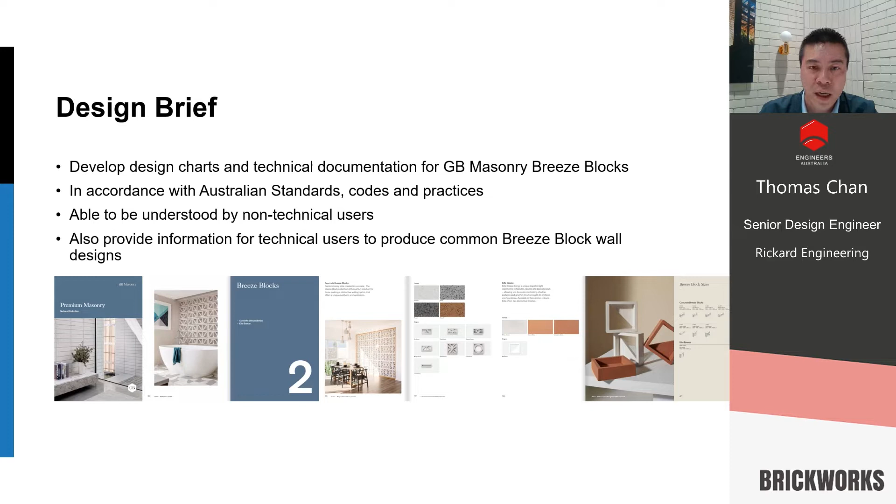But more importantly, we also provide information for technical users such as structural designers and facade designers to produce common breeze block wall designs. So when you start to design a breeze block wall, you probably have a few questions to ask. Say, if I choose a breeze block type, what bond pattern can I use? Can I use stack bond or stretcher bond or any other type?

The second question is, how do I support it? There are combinations of supports from bottom, top, or sides. You may have four side supports, three side supports with the top free, three side supports with one side free, or two side supports, which is top and bottom, or left and right supports. So among these variations, what is the largest wall in height and width you can build?

So, applicable standards. We designed the breeze block wall in accordance with the Australian standards. The first one, the most important, is the basis of design, the 1170 series: Part 0, general principles; Part 1, permanent, imposed, and other actions; and Part 2, which is the most concentrated part in our design, wind actions. And in some cases, if you build a house, you can probably use Australian Standard 4055.

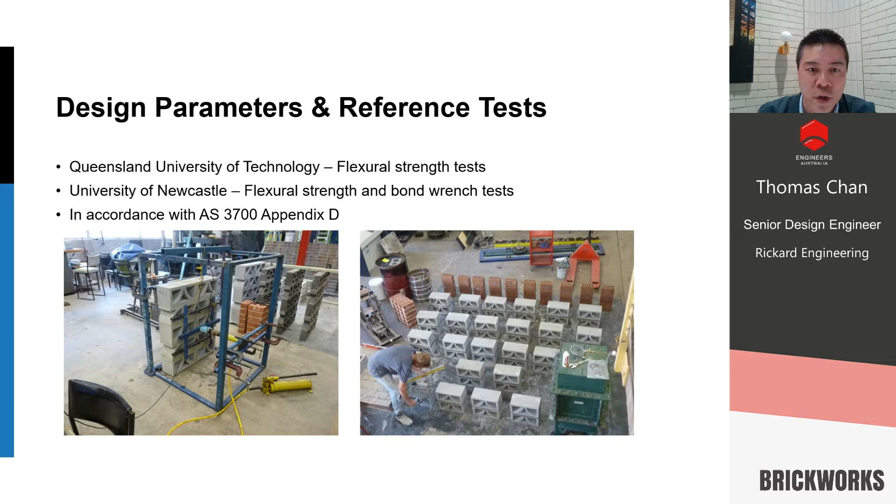And as you can see from the photos, we have tested a large number of specimens for each type of breeze block. So we can use the large amount of data to calculate the characteristic strength of flexural design parameters.

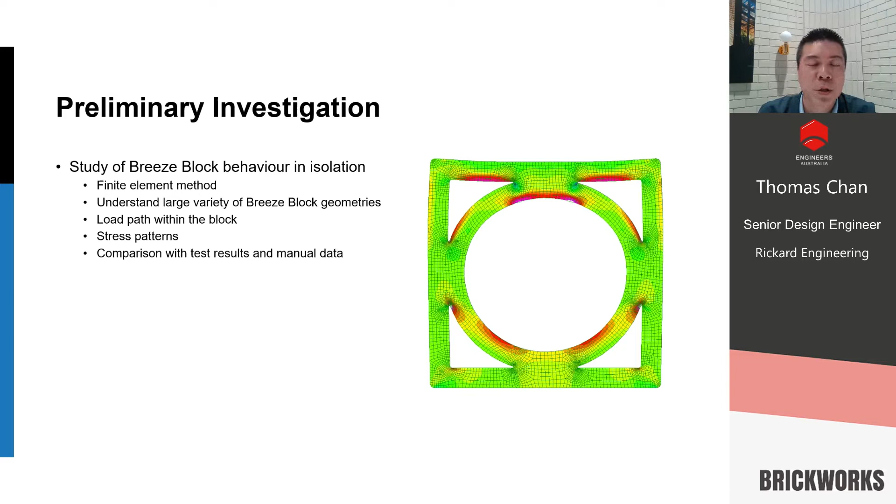After we have done the tests, and before we generate the design charts, we did a preliminary investigation on the breeze block. We have done a series of finite element models for each type of block to understand the large variety of block geometries, the load path within the block, stress pattern, and most importantly, we compared the test results and design manual data with these finite element results and found they're comparatively reasonable. And the test results could be used for the next stage design.

Analysis methodology. So the design principles are in accordance with Australian Standard 3700. We have unreinforced designs, which are designed with consideration of masonry and mortar strength only. We have also designed it as reinforced blockwork. It's designed with consideration of masonry and reinforcement.

And in accordance with Australian Standard 3700, Clause 4.6, there is a minimum robustness requirement of 0.5 kPa. So in our design charts, we provide a minimum loading of 0.5 kPa for the users to do the design.

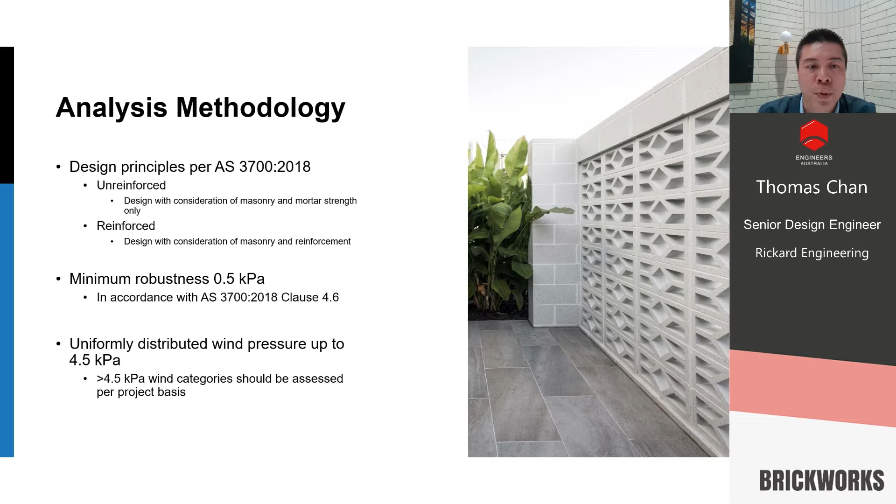And for the upper bound of the wind pressures, we chose to design up to 4.5 kPa without the porosity factor. So if you include the porosity factor, the allowable design basic wind pressures could be even higher. And this wind pressure should cover most of the design cases in Australia. However, if you have a wind load more than 4.5 kPa, it should be assessed on a project basis with a competent structural engineer or facade engineer.

So, design assumptions. This is very important for designers to understand what assumptions have been made in the design charts. First, as I said before, these design charts for the breeze blockwork are for a non-load-bearing wall, so there's no superimposed compression from above. At the supports, we assume there's no rotational restraint, which is a pin support. We always assume 10 millimeter bed joints and perpends. And M4 mortar is assumed.

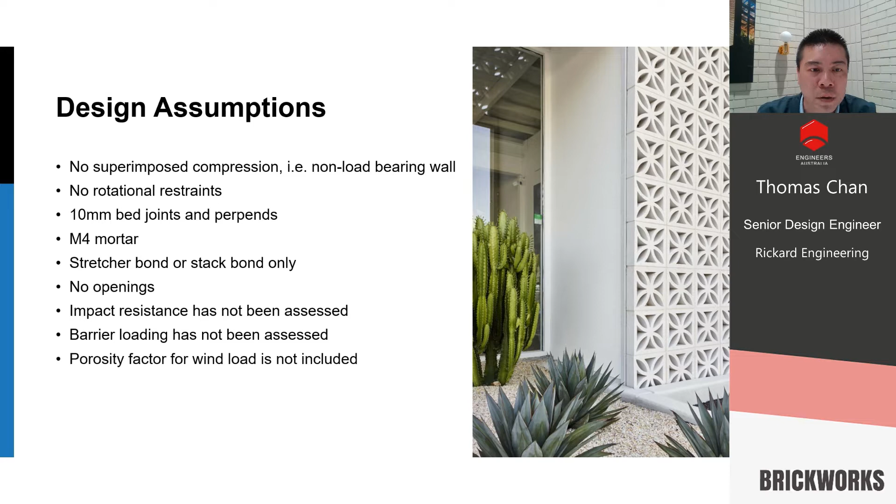And we design for stretcher and stack bond only. So there's basically no openings. If you design a wall with an opening of a certain area without any brickwork or breeze block, this is not covered in this design. As I said before, impact resistance has not been assessed, nor barrier loading. And most importantly, the porosity factor for wind load is not included. So in the next part 2, my colleague Alson will talk about this as an example.

So, grouping for designs. There are 8 different types of breeze block: circle, flower, kite, linear, cloud, diamond, wedge, and arc. We group them to simplify the design charts and minimize the number of charts we need to produce.

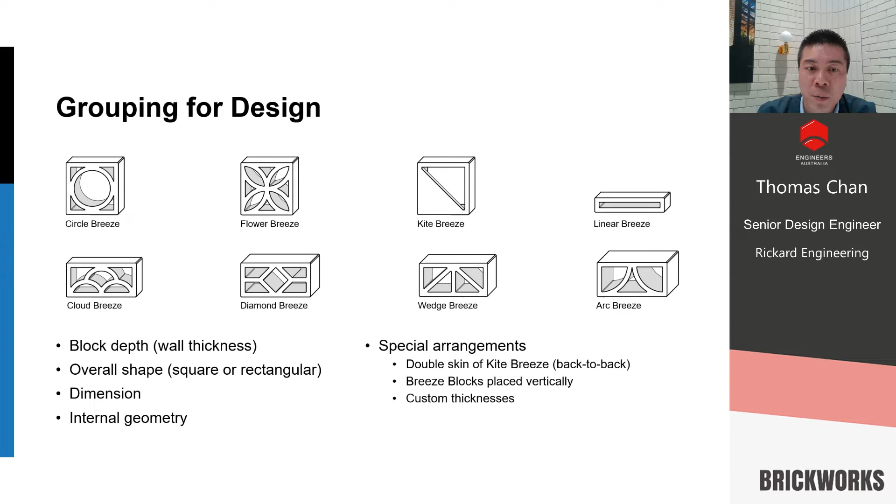We group them based on block depth, which is the wall thickness; the overall shape, square or rectangular; the dimensions of the breeze block; internal geometry; and special arrangements. For example, the kite breeze could be a double skin, which is a back-to-back double layer, or the breeze block placed vertically or horizontally. And sometimes we have some custom thickness, which is cut from the standard thickness.

So after a study, we have grouped them into mainly 6 categories, or 7 actually. The first group is square in 90mm thick: we have circle and flower breeze. Rectangular in 90mm thick, including diamond breeze, which is tailor-made, cloud breeze, and wedge breeze, also non-standard thickness. Rectangular in 140mm or 70mm; 70mm is a custom thickness cut from the 140 standard. This includes diamond and wedge. Rectangular 180 thick, which is the arc breeze, kite, double skin or single skin, and linear.

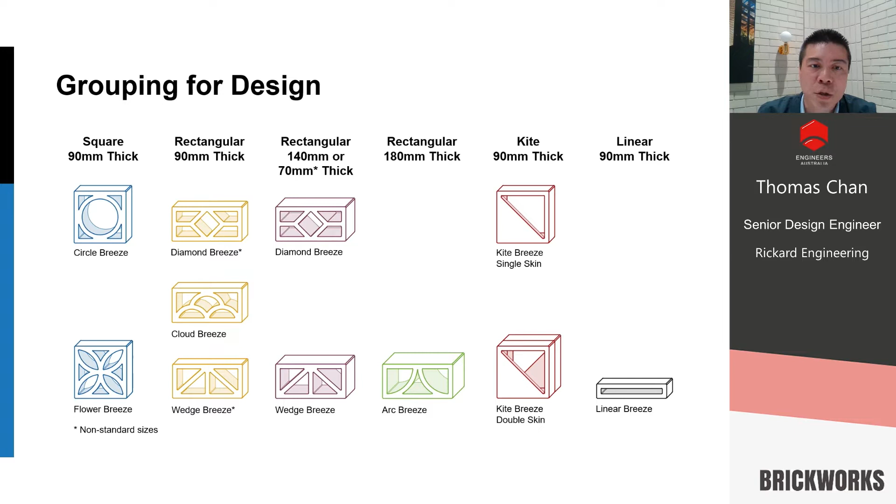The main purpose of this grouping is to minimize the number of charts, as I said before, but also to give the designer, particularly the architect or the interior designers, the flexibility to use different breeze within the group, because we design the charts for a single group with the most critical design parameters. That means within the same group, you can mix those different breeze to allow you the most flexible, aesthetic designs.

So, design flows. Based on the design parameters, assumptions, and grouping I said before, we designed the charts with calculations to Australian Standard 3700, with different wind loads, wall dimensions, bond patterns, support conditions, and different wind post designs. For all these different requirements, we have produced nearly 120 design charts. Here are 2 sample design charts, and Alson will talk about this in detail in the next part.

When you start the design of a breeze block wall, you need a layout height and width of the breeze block. Then you can choose the bond pattern, and then your breeze block type. Then you need to figure out how many and which sides can be supported, and determine the design wind load. Based on the manual, you choose an unreinforced or reinforced breeze design, and support options like wind posts or supports from the structure that are appropriate for your design wind load. Then you can check from the chart what wall dimensions are allowed and whether this complies with your layout design height and width.

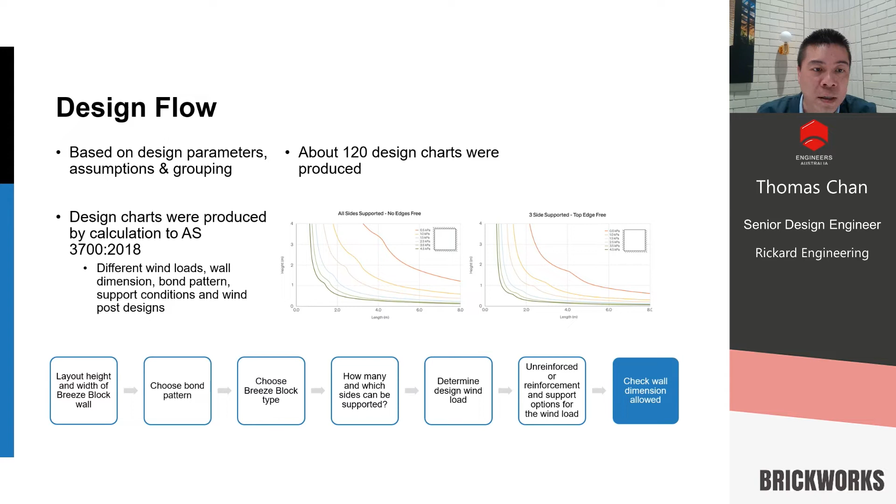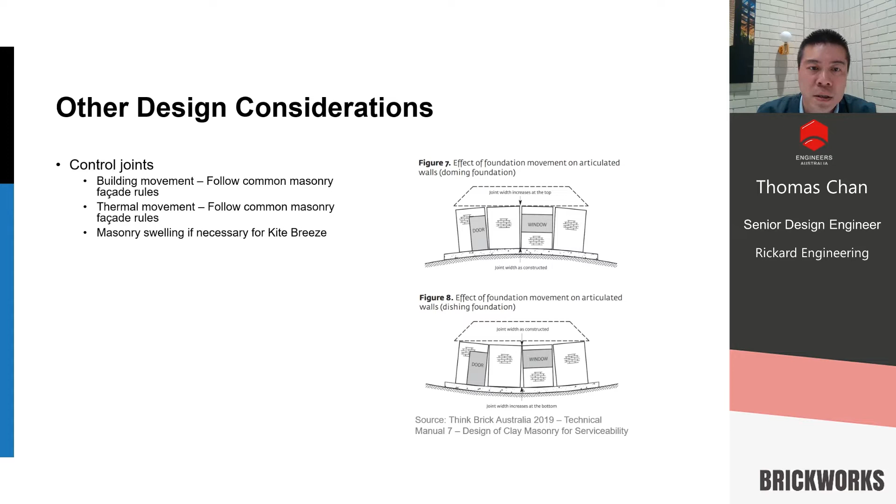Masonry swelling, if necessary, for kite breeze, because kite breeze is not a concrete breeze. If it is considered necessary, you may allow for swelling movement of the bricks. Applicability of using breeze block porosity: for a certain usage, based on the Australian standard, whether you can use the porosity to calculate the porous cladding reduction factor to give you a more efficient design, or particularly for freestanding walls, you may have a different porosity factor.

Breeze block corners. If you have a corner with two sides of breeze block in orthogonal directions, and the walls support each other for lateral wind, meaning one side of the corner supports the other orthogonal direction through horizontal axial capacity, this should be assessed on a project basis. Breeze block fully freestanding walls: this one is not included in our designs. The cantilever supports need to be designed on a project basis to achieve 2 or 3 side supports, but the infill block wall may be based on our design charts.

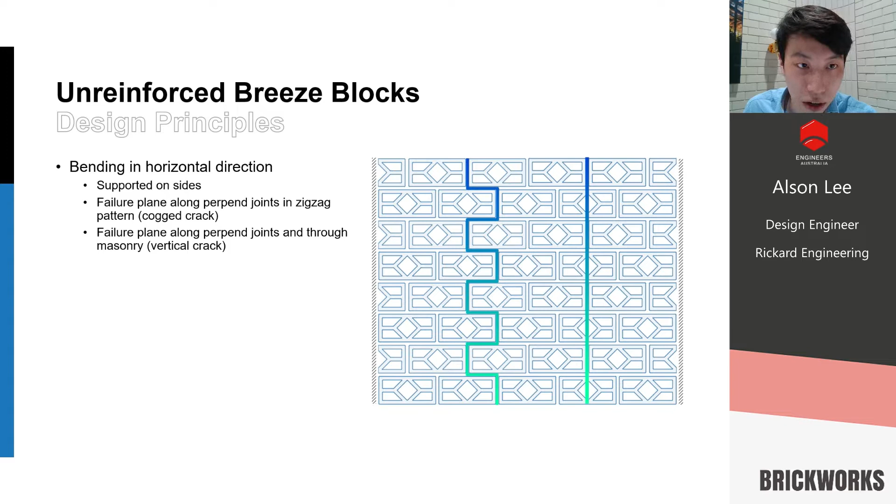In some cases, which is especially more pronounced in the breeze blocks, there is a failure plane along the perpend joints and also through the masonry. It's kind of like a straight crack through the whole wall. So this failure is dependent on both the mortar and the block strength itself. So following on this, our breeze block specific consideration, which is atypical of a normal bond masonry wall. As stated previously, it has a weaker section than typical masonry, reduced horizontal bending capacity.

And what do I mean by that? We need to identify the weakest plane in each block geometry. So for each type, we are trying to identify where we expect the flexural failure to occur. There are simple examples, so I'm going to start off with the circle here. Obviously, the weakest failure plane would be within the center of the block. But for more complex geometries, it may not be so obvious, such as the flower. One might say that the failure plane might be within the middle, but others may say that the point of failure might be slightly towards the edge.

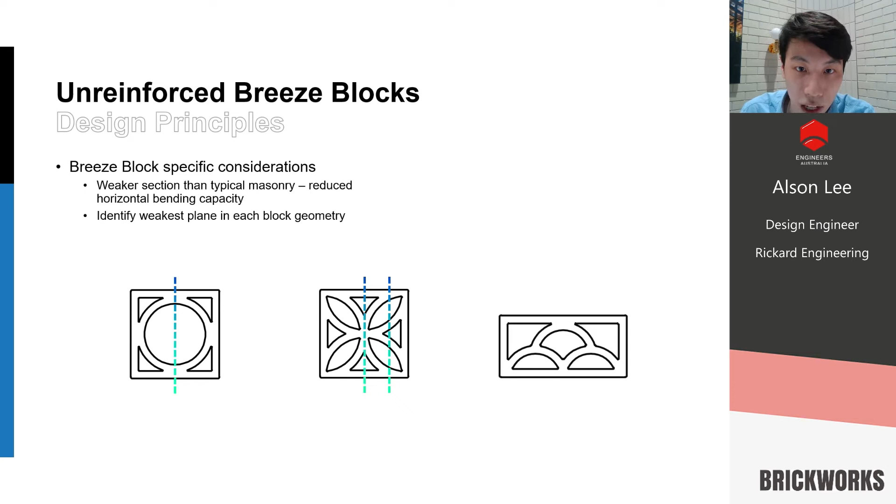Now, through our finite element studies, we have identified the critical failure plane and have developed design charts based off of that. Going through one more example, say the cloud breeze. Again, the center failure plane is the most obvious to consider, but how about an off-center failure plane? Or in the case where we're doing a vertical configuration, to induce a different direction of bending, we may also consider a horizontal failure plane like this.

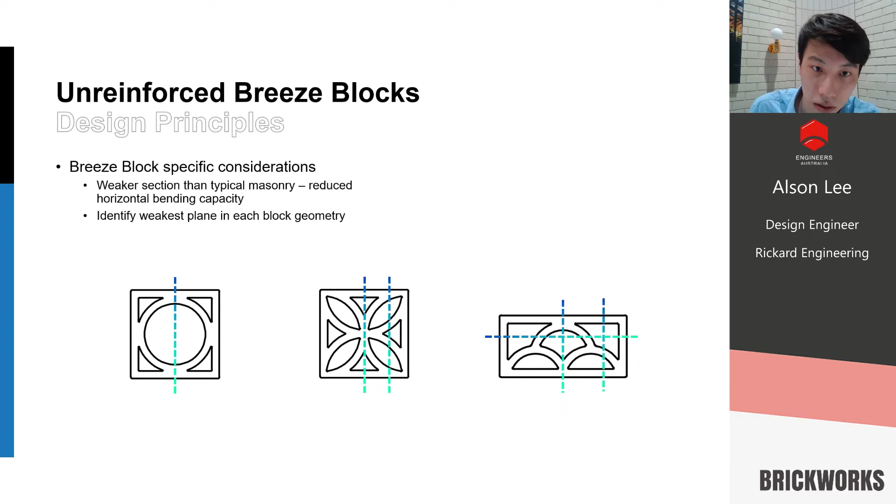Now, unreinforced walls must be stretcher bond only. The reason for this one is due to design requirements from AS 3700. Stack bond has no horizontal bending resistance in accordance to 3700, and the reason is because of the perpend spacing factor, to be more technical. There is no allowance in the code to allow you to make an unreinforced stack bond wall. So stack bond cannot be unreinforced and must be reinforced, which will be addressed in the following section.

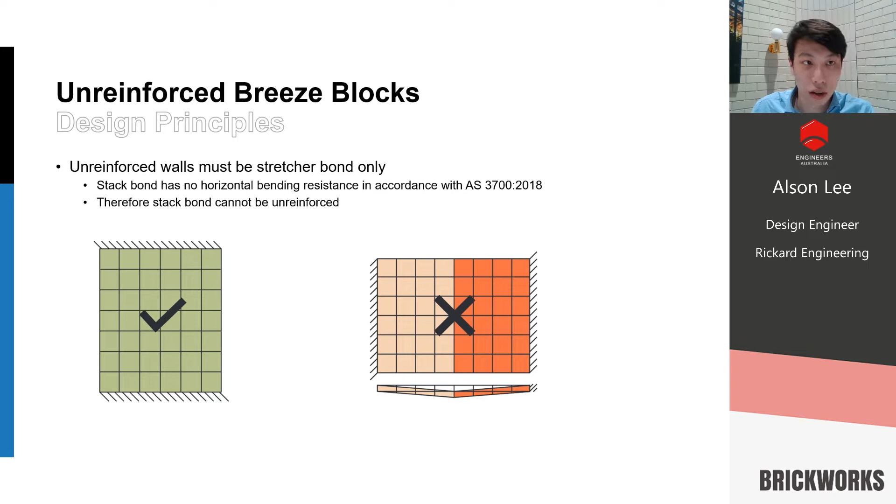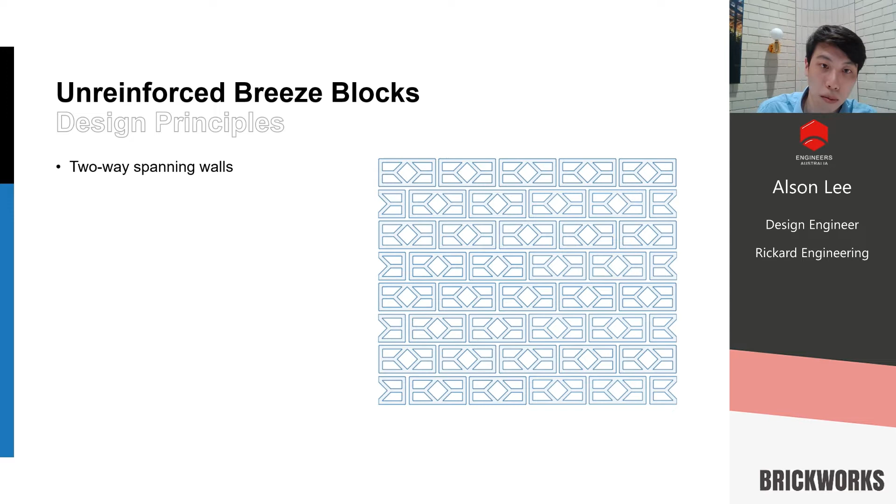So now you may ask, okay, we've gone through simple one-way spanning walls, either top and bottom supported or side supported. Two-way spanning walls with a combination of supports are a combination of vertical and horizontal bending, similar to the design of a two-way slab. This can be designed using the virtual work design method in accordance with AS 3700-2018, which has equations to incorporate both horizontal bending and vertical bending components.

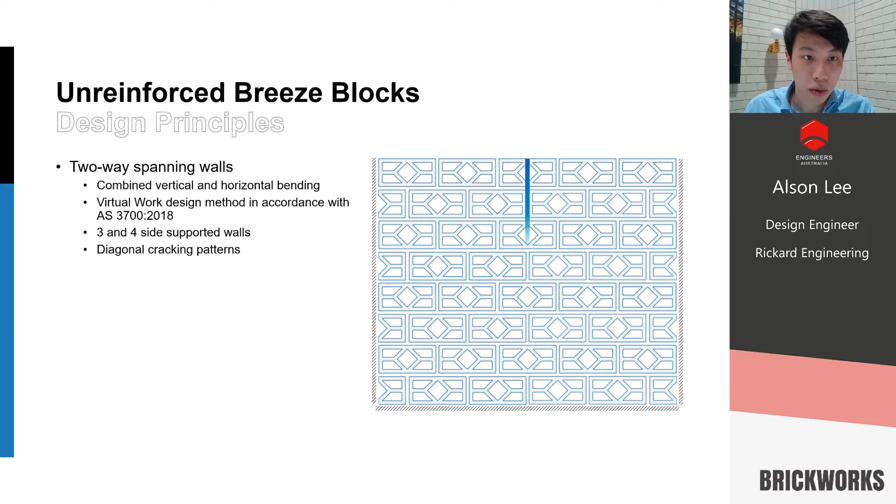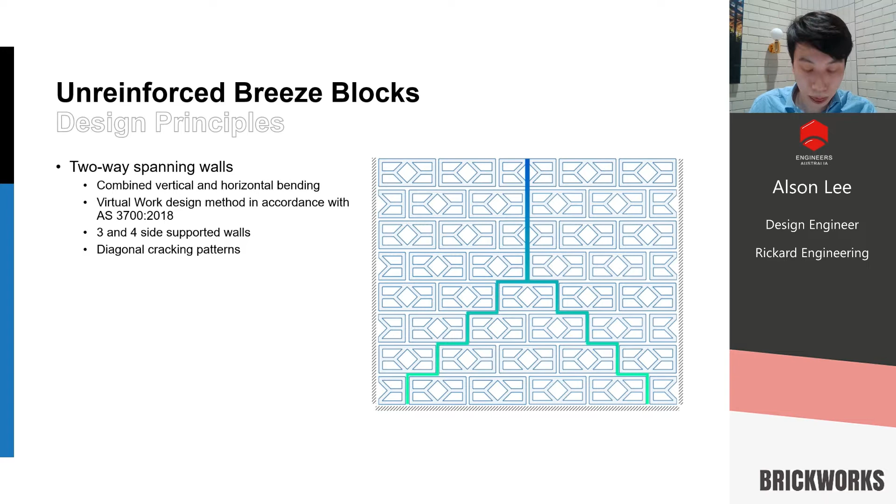Okay, so we have 3 and 4 side supported walls, and what tends to happen is that we get a more complex failure mode, namely diagonal cracking patterns in addition to the vertical and horizontal cracks. Our idealized crack pattern for our analysis will depend on our support conditions and our wall aspect ratio. For 3 side supported with the top edge free, we're expecting a failure mode similar to the diagram shown, with a diagonal crack and then a vertical crack splitting towards the free end.

A similar failure pattern can be observed when the side edge is free, so imagine you've rotated it by 90 degrees. The asymmetry is due to the slightly asymmetric nature of our blockwork example, but these are idealized crack patterns, just to show the idea of failure, or what we expect. And finally, we have 4 side supported, which will exhibit almost fully diagonal cracking patterns depending on our wall aspect ratio.

For those who are interested, there is great further reading and documentation, both in the AS 3700 Supplement 1, which details research and the virtual work method, and also the Think Brick technical manuals, which are a fantastic resource with many examples and technical information.

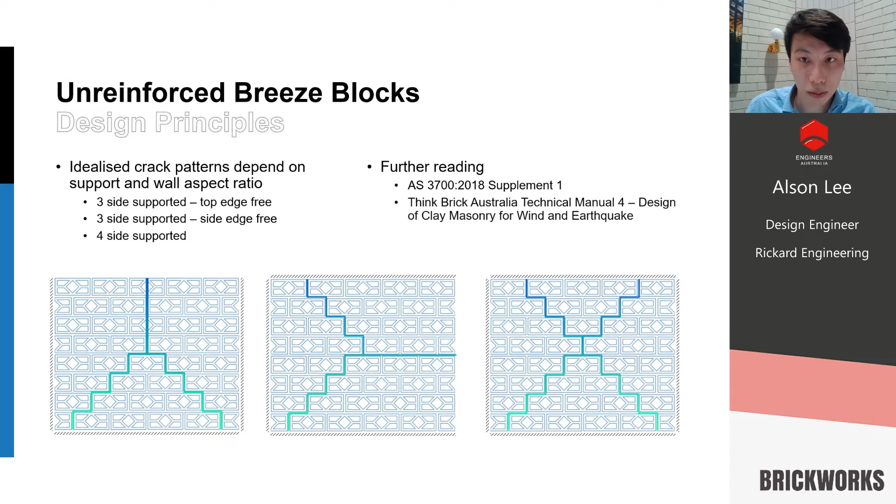So let's have a look at how we developed our unreinforced stretcher bond design charts, because we know that we cannot build unreinforced stack bond. We have charts for 2 side supported, which in general is for internal applications only due to the reduced capacity of these walls. However, once we introduce another support, namely with the top edge free or with the side edge free, we can have greater capacities which will be able to scale into external conditions. These will be our most common applications. And if you are fortunate enough to have all 4 sides supported, we have charts for that as well.

We haven't really gone through what a support is actually considered as. A support is considered if a lateral restraint is provided. We're assuming no rotational restraint, which for those interested will increase the capacity in accordance with 3700, increasing one of the factors there. But for the sake of the design charts, we have assumed everything as purely pinned at all supported edges. Another consideration, touched upon before, is a maximum length, typically 5 to 6 meters, for control joints, for building movement, swelling, etc.

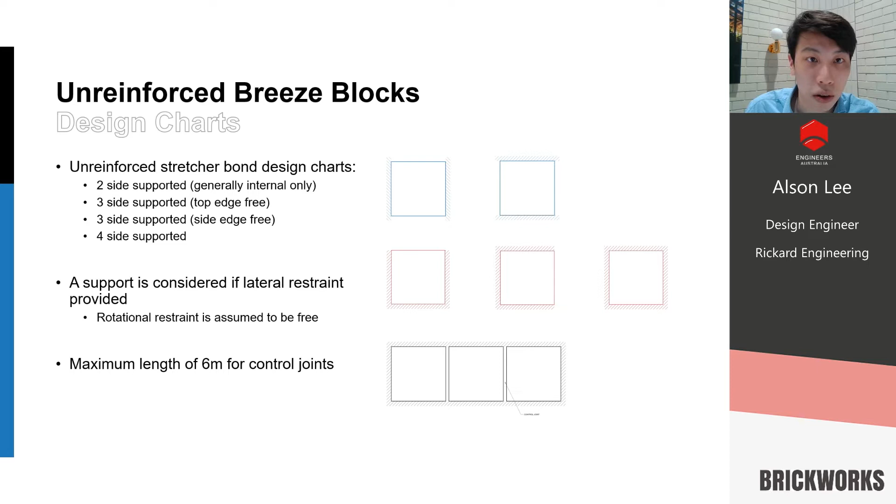Hopefully that gives a good overview of the unreinforced breeze block, and we're now going to do a design example. For example, I want to build an external detached feature wall with the wedge breeze blocks using stretcher bond, supported on 3 sides with the top edge free. An engineer has assessed my wall, or you have performed the wind loading assessment yourself, for an ultimate wind of 1.5 kPa. The design constraint I want to enforce is that my wall length should be 3 meters. So how high can I build?

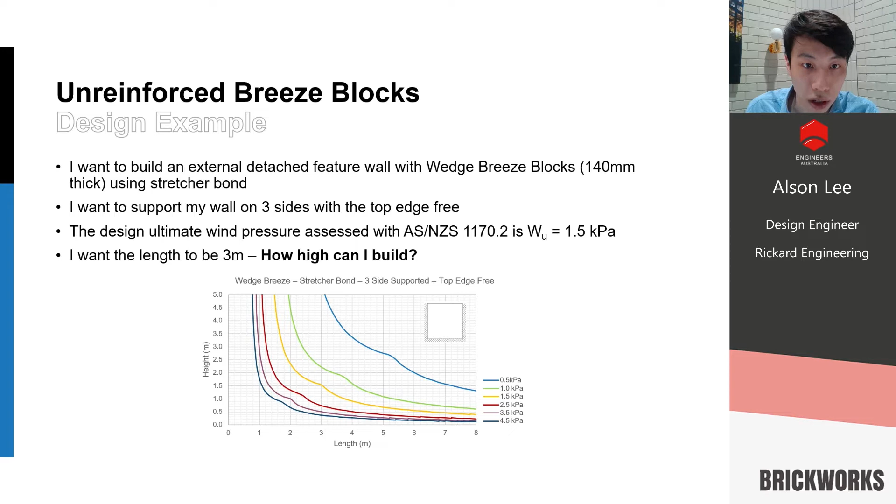We'll look at the appropriate design chart per the design manual, in this case the wedge breeze block in stretcher bond, 3 side supported with the top edge free, and we'd look at a chart that looks like this. Zooming in, we are trying to locate the point for 1.5 kPa with the restraint of 3 meters in length, so we'll be looking at this point here. This is quite straightforward to look up. We can observe that the height we can build for 1.5 kPa will be 1.6 meters. So the total wall without the porosity factor will be 3 meters by 1.6.

So since this is part of a freestanding wall, the designer may consider the porosity factor, which is further described within the Australian Wind Code 1170.2, which is the freestanding wall porous factor, porous cladding reduction factor. So we've calculated this beforehand based off of the porosity of the breeze block, which gives us a factor of 0.8. So the designer may choose to reduce their wind load by this factor.

So now it would be 1.5 kPa times 0.8, which would give us 1.2. And we can design for this reduced wind load due to the porosity of the breeze block. So let's re-look at our chart. Again, 3 meters in length, but now designing for 1.2 kPa and looking at our increased height that we can achieve. So now we have 3 by 1.9 dimensions which are allowed.

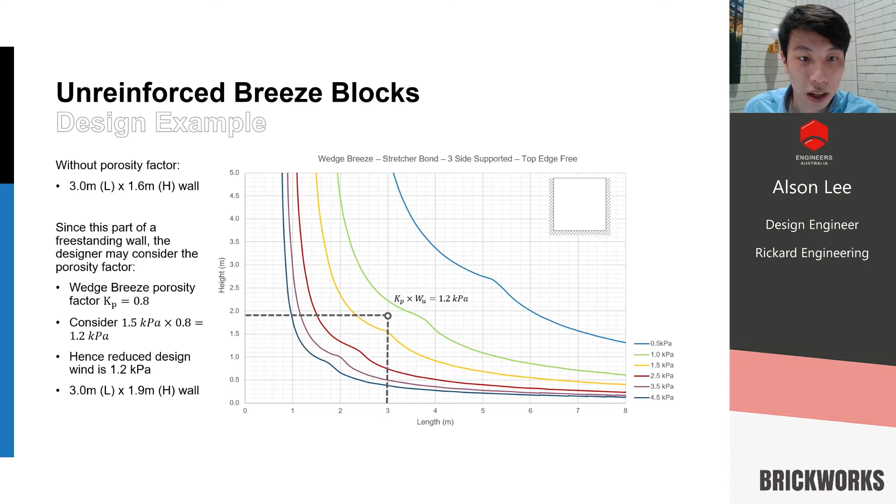Okay. So for the second portion, we're going to design reinforced breeze blocks and the design development of that. Now, reinforced breeze blocks. The reinforcement shall be provided at every bed joint. Now, we don't have much choice in terms of where we provide reinforcement for breeze blocks. So the obvious location is going to be the bed joints, horizontally laid, because we're building the breeze block walls from the ground up. Now, this is limited by the 10 millimeter bed joints, as a standard width.

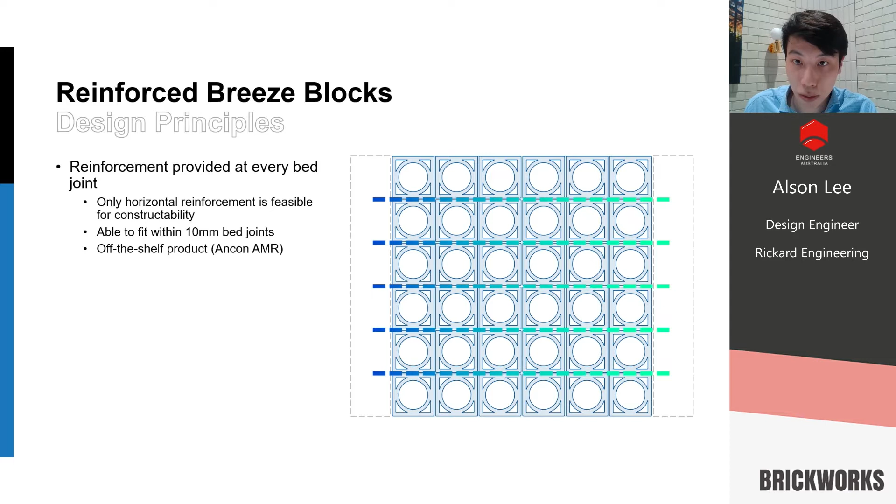So we have investigated off-the-shelf products such as Ancon AMR ladder style bed joint reinforcement to be able to carry these out-of-plane loads as a reinforced section. Now, the way we are going to design this is as a one-way horizontally spanning wall to simplify. Now, the astute of you may be saying, okay, the bottom of the wall must be supported generally because that's how the wall is going to be standing. However, for simplification purposes, we will be designing simply as one way, as conservative and for ease of calculation. So we assume no fixity at the bottom.

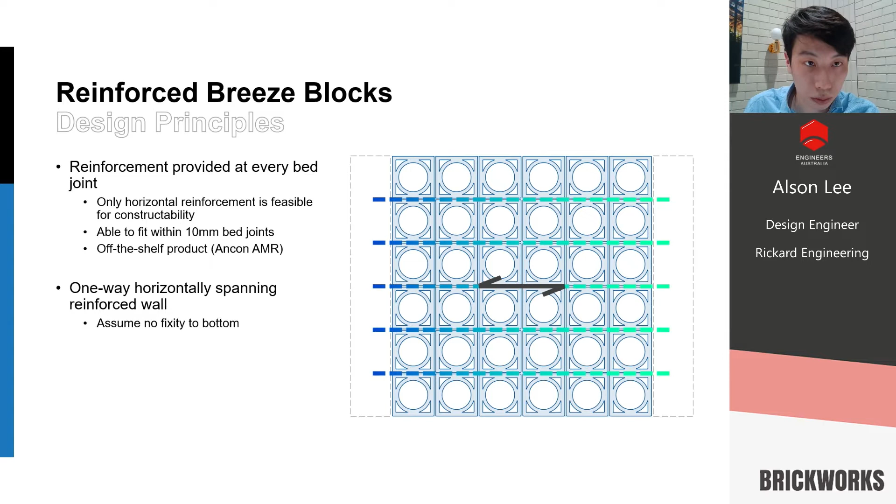We are going to utilize cracked section analysis where necessary and use stress block equilibrium as was just discussed. And we also have to have consideration for ductility and ductile design to ensure that the wall will fail safely and not in a brittle manner. Now, there are some masonry specific calculation parameters per the 3700 code which we should be aware of, which is the equivalent rectangular stress block, which is slightly modified from the concrete code, and also the compressive strain limit, which is slightly higher, it was 0.0035.

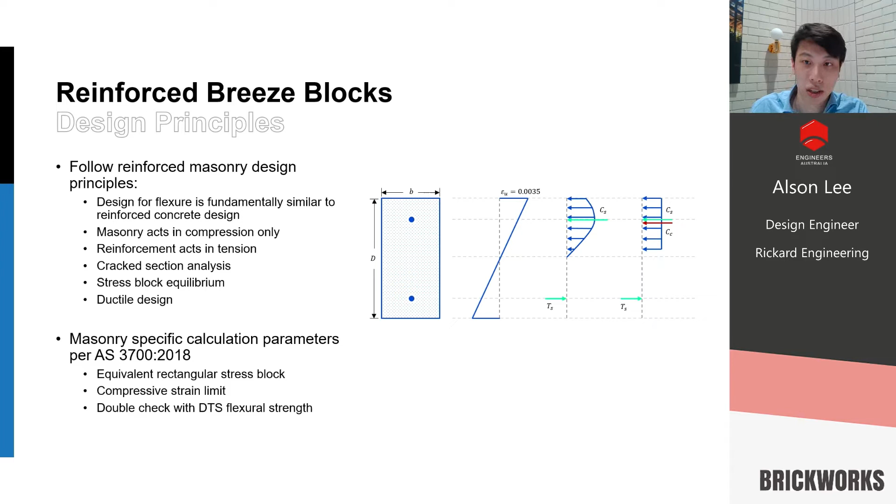We will also have reduced compressive capacity due to the section being hollowed out in some portions. Now, this is especially important with our finite element study to see how the stress is developing and to see where the load is transferring in flexure. Because obviously, we are relying on our masonry to carry this compressive load and our tension reinforcement to carry the tension. And this is going to be a doubly reinforced design.

Okay, so just as a side note, there is generally no distinction for stack bond or stretcher bond reinforced design. So we're counting the compression block as identical, and any additional strength gain from stretcher bond is ignored. And we are saying that the reinforcement strength dominates this behavior.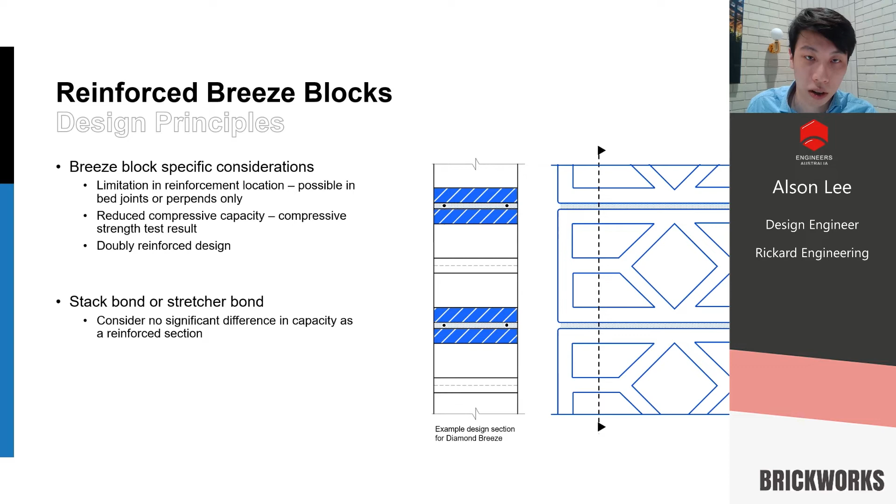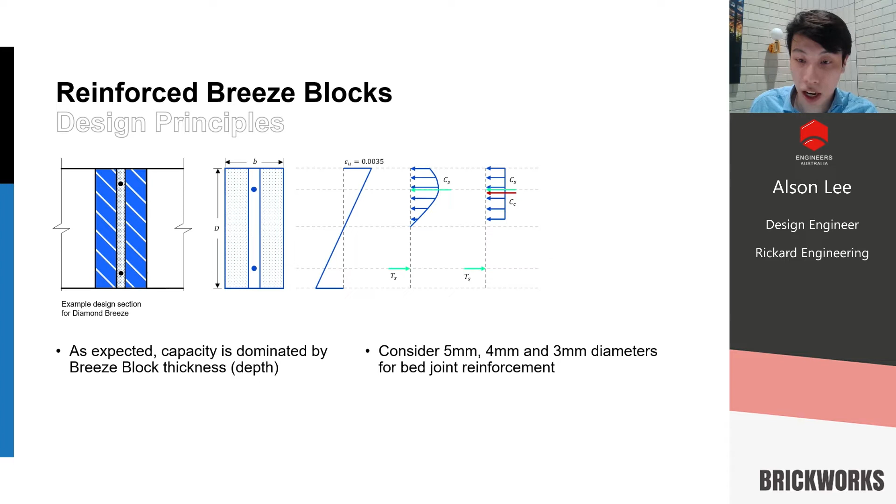So let's have a closer look using the section, rotated here. We are taking a slice of our breeze block as our design section and applying our reinforced masonry or reinforced concrete basics with the modified parameters to be able to achieve our ultimate flexural strength. So as expected, the capacity is dominated by the breeze block thickness. And in our study, we've further considered 5mm, 4mm, and 3mm diameters, which are off-the-shelf products from Ancon.

So how does it work as a system? Now, since the breeze block is spanning horizontally, we need to provide fixity in the form of some vertical columns. So one such choice is going to be adding reinforced blockwork columns, which are spanning vertically. So in this sense, we're saying columns in that they're vertical, but really in design, they're acting as a beam, so a flexural beam.

So the horizontal bed joint reinforcement will lap with this to form a system. As you can see from the diagram, the force will transfer firstly horizontally and then vertically into columns, and then have reinforcement lapped to ensure that we develop our stress and develop our force transfer. And this reinforced blockwork design is typical of AS 3700. So this is fairly straightforward. We can refer to other sources for this.

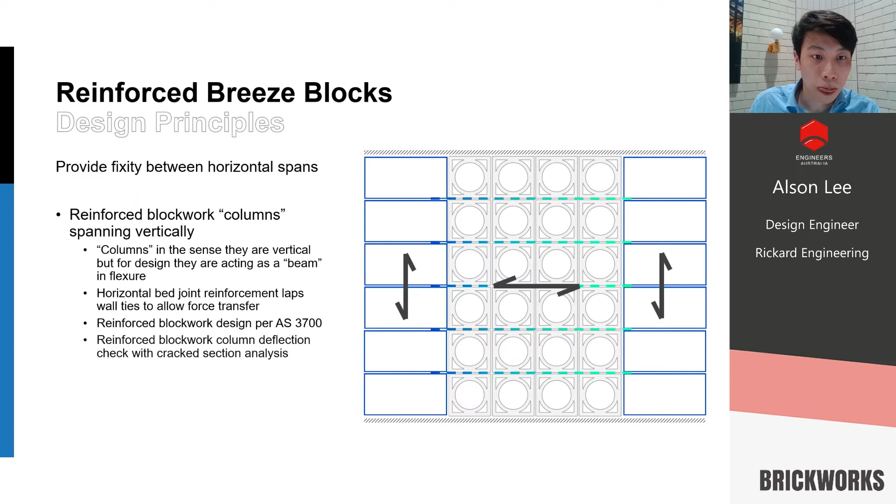However, we also need to check the stiffness of the column. Now, this is essential in that we need to have sufficient stiffness in order to say that this assumption is correct. Now, the reinforced blockwork column deflection is checked using cracked section analysis, which is not typical in the standard. And we've used some additional materials to check this.

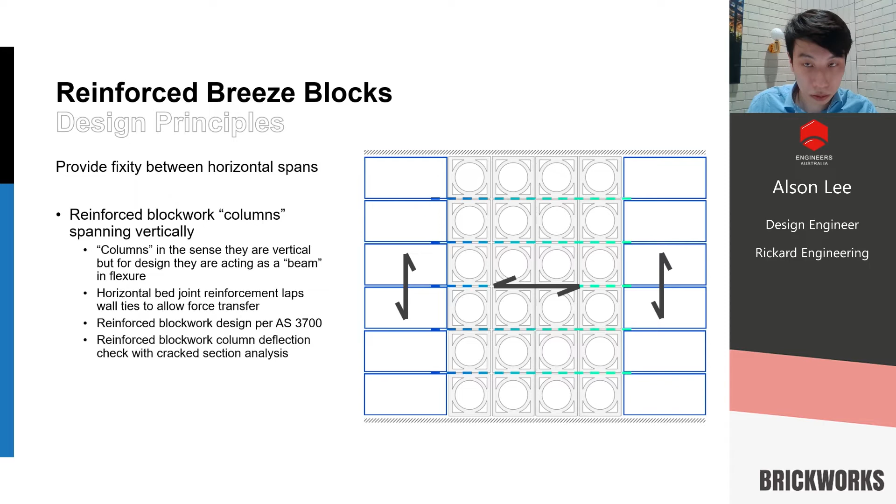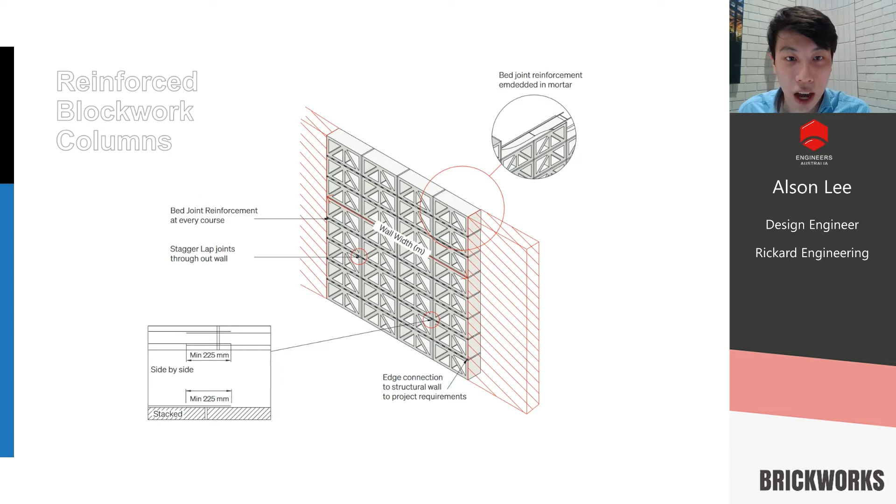So as a 3D system, let's have a look here. We have our stack bond breeze block wall with bed joint reinforcement, and hatched in red here is going to be our blockwork columns in quotation marks. Now, these can be however many blocks wide, up to a limit of 4, and obviously up to the discretion of the designer to see if the dimensions look applicable for our load case. So obviously you can't just say 8 blocks of reinforced is going to be acting as a single column.

Now, another choice that we have, which is probably preferred, is going to be wind posts. And they're going to be concealed within the perpend joints of our breeze block wall. So these can either be in stainless steel or hot dip galvanized steel, depending on your corrosivity category and your corrosion rating service life.

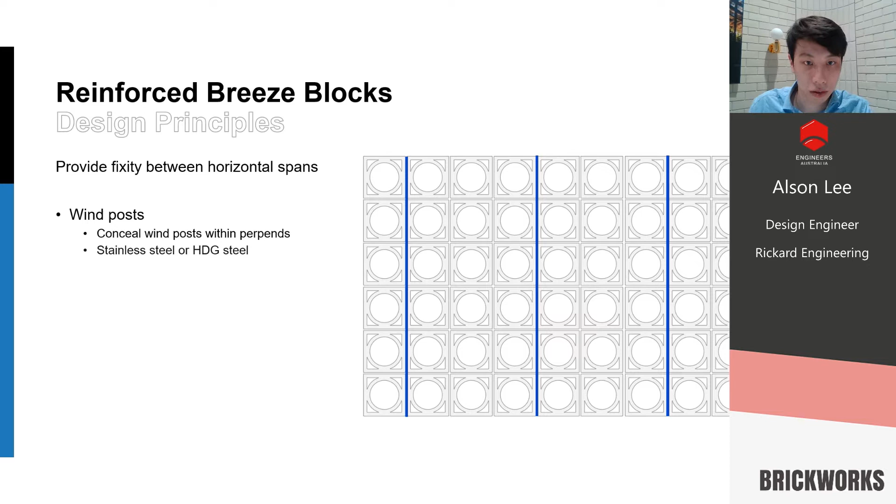And it works in a similar manner. So firstly, we have our bed joint reinforcement, allowing the breeze block wall to span horizontally. And then this in turn transfers the force into the wind post, which will span vertically. So the detail of which is going to be a little slotted connection. We have wall ties slotted in between these wind posts, allowing the transfer between the bed joint reinforcement and the wind post. This will allow us also to have a continuous and seamless wall, which we can't really achieve using reinforced blockwork columns.

And another detailing thing that we have to care about is that there should be at least one block at the end to cap off. So you can see here on the left-hand side, there's one extra block. And here's a look at 3D. So just to make sure it's a bit more clear, we've got our horizontal bed joints, our stack bond, and then we have our wind posts in between with the slots. So please refer to the manual, which has more information on this.

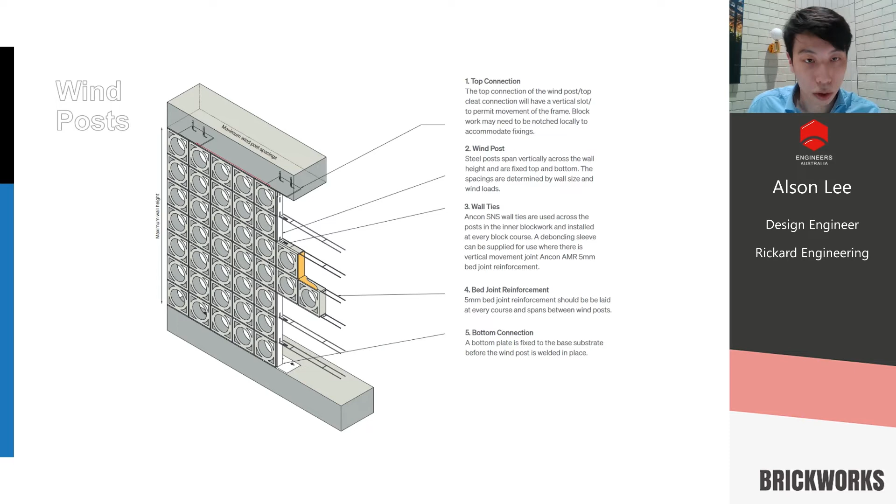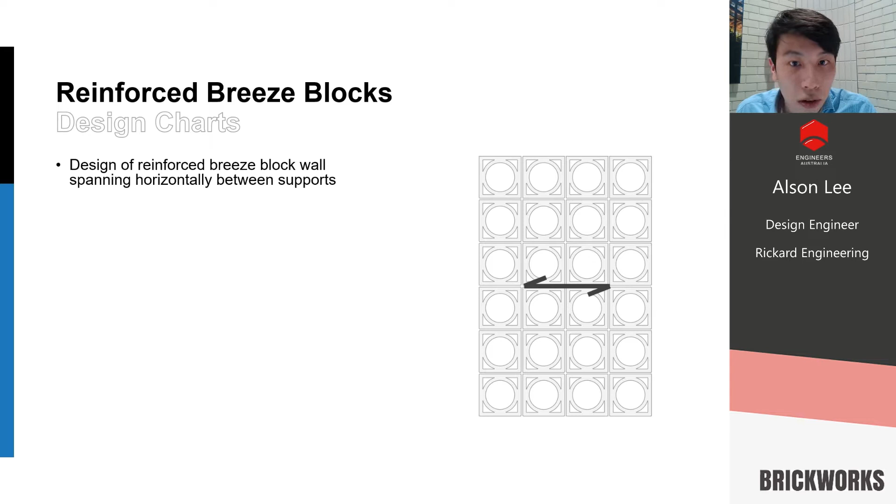Okay, so reinforced breeze block design charts. In essence and in summary, we are firstly designing the reinforced breeze block wall to be spanning horizontally between the supports, and then designing vertically spanning supports to transfer the load back into the primary structure. Now, this can be in the form of reinforced blockwork or in the form of wind posts, either stainless steel or hot dip galvanized. A further check is required to ensure we have sufficient stiffness, so we can make sure that our assumption is correct, such that they act as supports.

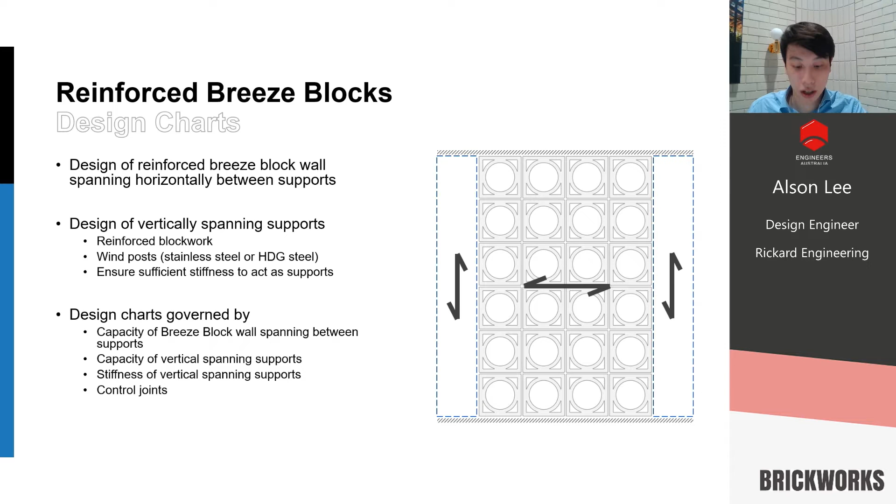And essentially, our design charts will be governed by these several parameters. So firstly, the breeze block capacity spanning horizontally, the capacity of the vertical supports, the stiffness of the vertical supports, and lastly, our control joint positioning, which will limit our wall length. Okay, so hopefully that was a good overview of our reinforced breeze block design development. I will now go into some examples to show how to use our design charts.

Okay, so now let's go through some reinforced breeze block design examples. So let's start off here. Our design example 1, which is with reinforced blockwork columns. Now, I want to build an external non-load bearing wall with breeze blocks using stack bond, which is part of my house. Now, this is an important side note which we'll go through in a second.

I must use bed joint reinforcement because it's stack bond, and I want to use blockwork supports, 2 blocks wide. So the design ultimate pressure that is determined in accordance to the wind code is 2 kPa. And my design constraint is that I want 4-meter sections of arc breeze blocks. How high can I build? So now let's look from the manual and refer to the correct chart, which is as follows.

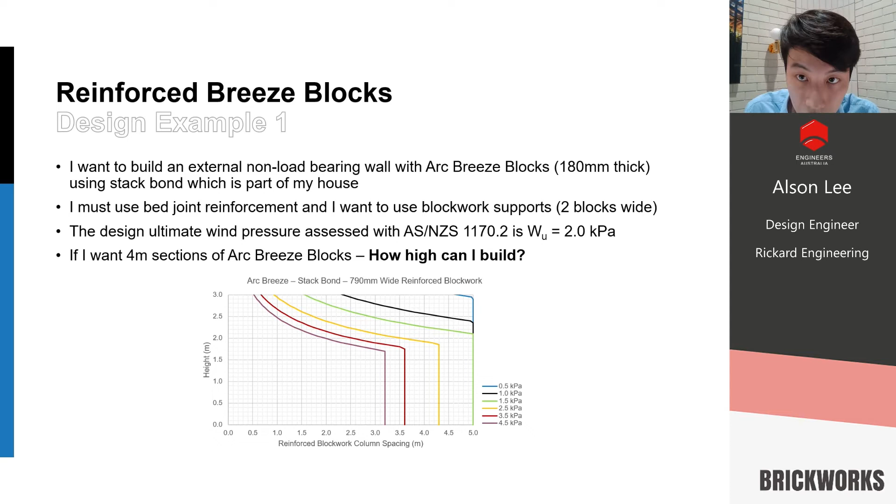Arc breeze, stack bond with 790 wide reinforced blockwork. Now, what is the 790 referring to? So let me zoom in first. 790 is referring to 2 blocks wide of typical 390 wide core filled blockwork, reinforced typically with 2N10 or 2N12 and 25 MPa non-shrink grout. So now let's look from 4 meters as our blockwork column spacing, referring there, up to 2 kPa and reading across.

So without the porosity factor included, we have a limitation of 2.1 height of our wall for as many bays as you'd like, without the control joint requirement. That's all right. So 790 wide blockwork at every 4 meters max spacing. So at centers and control joints to suit.

Now, since this is not specifically part of a freestanding wall, the note here is that it is an external non-load bearing wall, which is part of my house. So because it's considered part of my house, it is up to the designer, as it is not explicitly stated in the wind code, not without a wind tunnel test, say for example, to use this porosity factor. So this is down to engineering judgment if you want to use the increased capacity.

For detailing, there's good diagrams in the manual that we can refer to. So I'll quickly just go through this one: we have typical core filled blockwork, 2N10 or N12 each block, up to 4 blocks wide. Of course, the designer has to look at the relevant conditions to see if it is applicable to assume that this single 4 block wide column can support our breeze block wall. So 4 blocks is approaching the limit, 5 blocks, it's difficult to say.

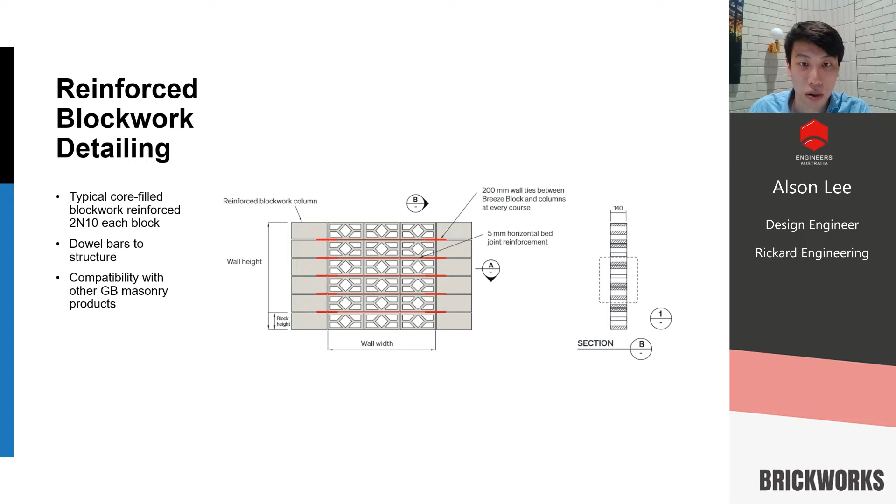So now let's look at our second design example using wind posts. In this case, I want to build an external screen with circle breeze blocks using stack bond. I also must use bed joint reinforcement because it's in stack bond, and I want to use these concealed wind posts for the seamless look. The design wind pressure that is determined using the wind code 1170.2 is also going to be 2 kPa. The constraint is that I want my screen to be 1.75 meters high. Now, how many wind posts do I need and what centers do I need to space them at?

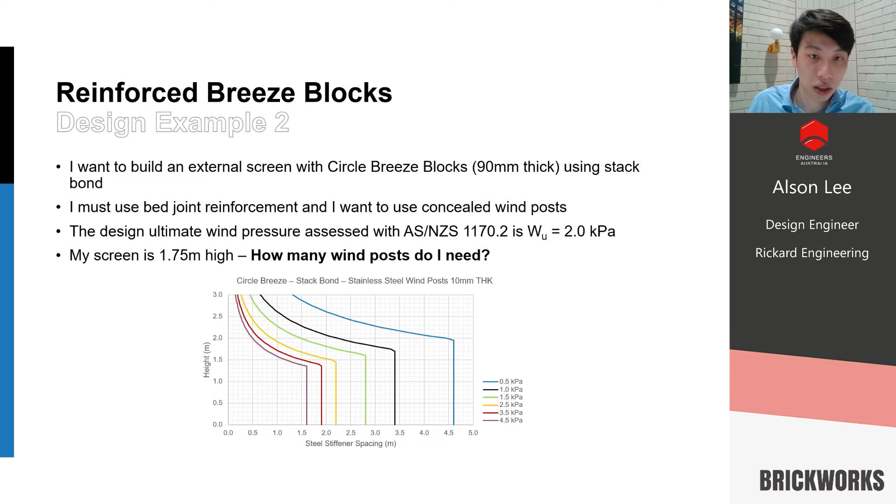So let's refer to the manual and look at the chart corresponding to this case. So I have circle breeze, stack bond, and using stainless steel wind posts 10 millimeters thick. I've elected to use stainless steel in this case due to my corrosion category. So zooming in here, let's read. Again, I want to read for 2 kPa that I have, without a porosity factor, 1.75 meters in height. So the steel stiffener spacing is going to be 1.7.

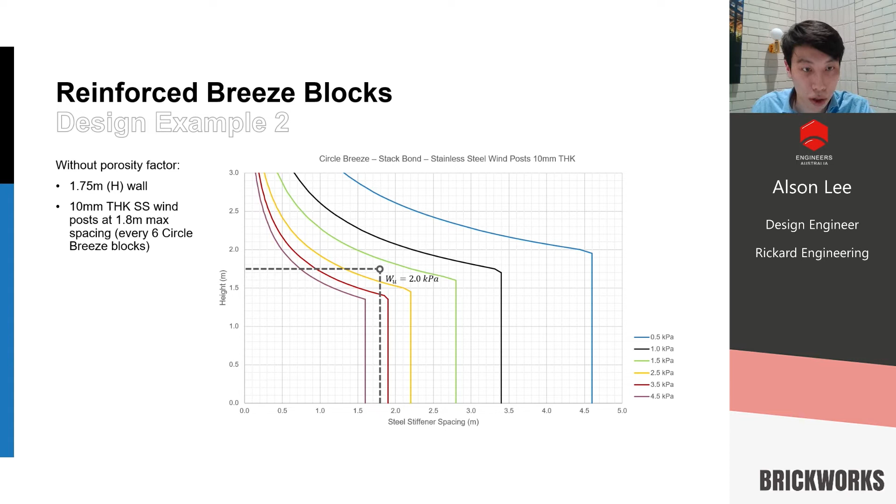And these are going to be 10 millimeter thick stainless steel wind posts. Okay, slightly misread there, at 1.8 meters max. So that's approximately every 6 breeze blocks, which is good for constructability. Obviously we're going to have to round it down in the case it goes in the middle of the breeze block. And we have control joints to suit again.

Now, in the discussion of porosity, we have to assess using engineering judgment if the porosity factor can be included. In the case of an external screen, it may be decided by the designer that the porosity can be included, but it really depends on the distance between the screen and the structural wall behind, or say, for example, a window.

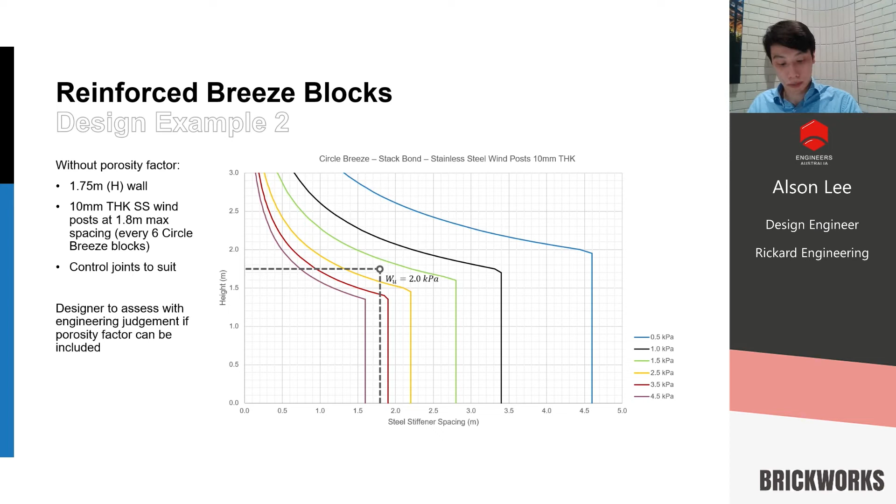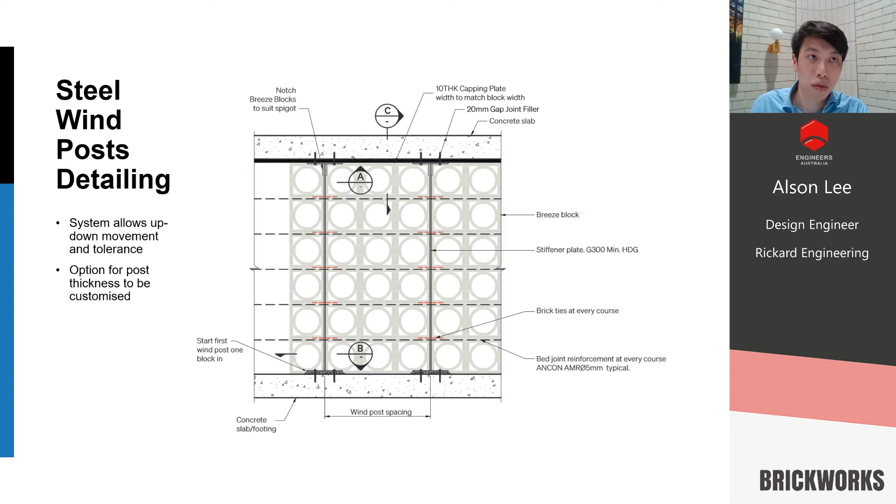So for detailing of the wind post, more to be found in the manual. As a disclaimer here, our system will also allow up and down movement tolerance. So this is the wind post itself. And there's options for this post to be even thicker and stronger should your wind load require it, for regions exceeding 3 kPa or even 4 kPa, say for example cyclonic regions near the coast.

Now, looking at this joint, it is essentially a notched steel post section fit inside a sleeve, which will allow up-down movement. Slots, as we've discussed before, allow brick ties to be locked inside and allow the force transfer between the blocks and the steel post.

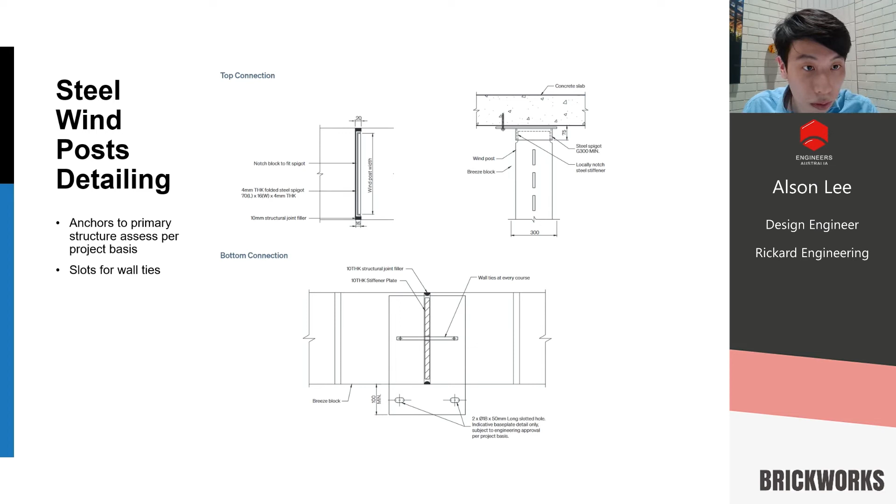So the anchors to primary structure in this diagram shall be assessed per project basis. And this is just a general detail for general walls. The slots for the wall ties, as we stated, which lock inside.

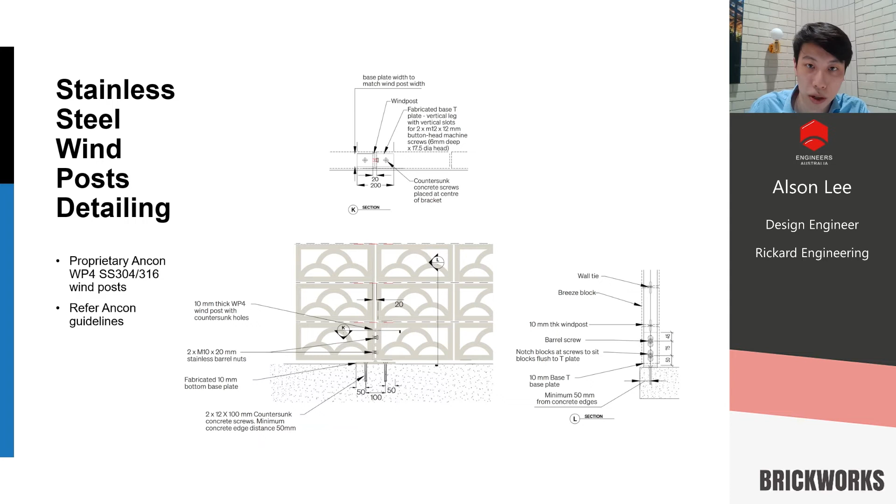Now, before I talk about control joints, for the stainless steel wind posts, there's also an option to use a proprietary system, such as the Ancon WP4 system, which has 304 and 316 stainless, so marine stainless if required, which can be bought off the shelf and fit to the breeze block walls as an alternative. So we either have our custom wind posts, as we've seen before, or we can use these proprietary stainless steel Ancon wind posts. So please refer to the Ancon guidelines for the engineering design of these ones, or they shall be checked by a competent structural or facade engineer.

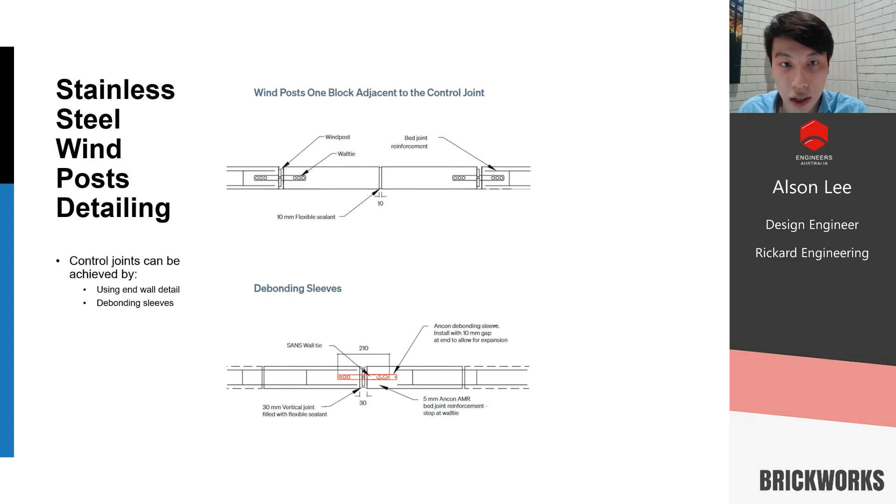Now for movement joints and control joints, a consideration that can be made is to either use an end wall detail, so cap it off one block from the post. So this is the top detail here, and then seal off with flexible sealant to allow that movement joint. An alternative is to use debonding sleeves, which is basically a little plastic sleeve which will stop the wall tie from bonding to the mortar and allow movement. And that will conclude our breeze block masonry walls, structural design and development.

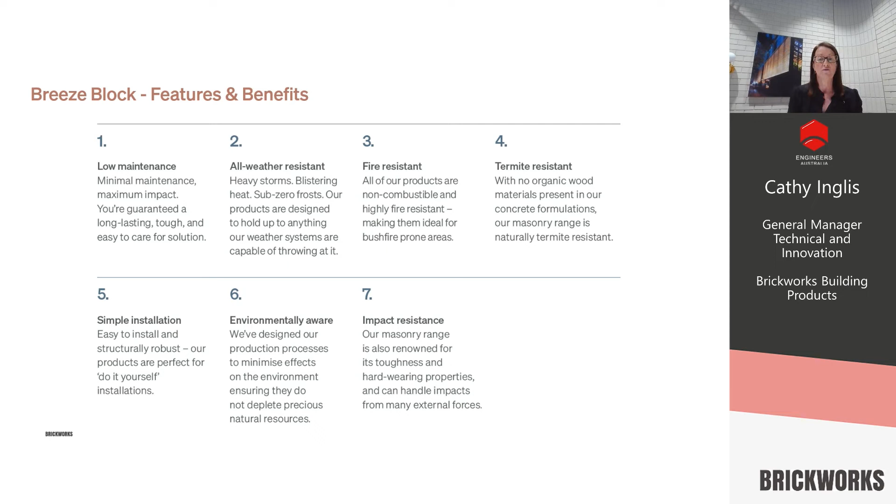So architects are using breeze blocks for all of their benefits. They're low maintenance, they're all weather resistant, can be used in any climate zones, they're fire resistant and non-combustible, they're termite resistant, very simple installation, and they're environmentally sustainable. The breeze blocks are made in our factory at Gympie in Queensland. And this factory, we've just done our EPD, our Environmental Product Declaration, the first one on any masonry products in Australia or New Zealand. So you can look at the EPD and assess how they compare to other products. And they're also impact resistant.

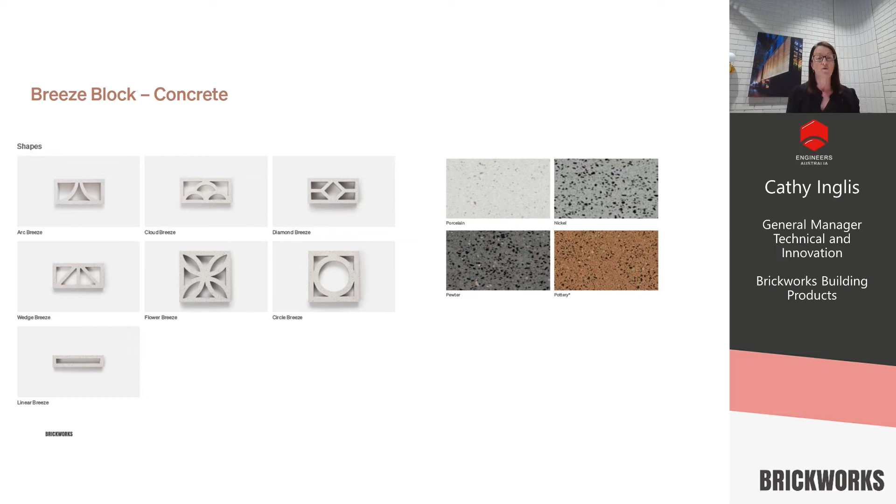The range of breeze blocks covers 7 different shapes, and these come in the different formats and sizes that have already been covered, but they come in 4 colours as well, so you've got a choice. So these breeze blocks can be used individually or combined together in different formats to develop walls that will suit the architect's design intent. So there's 7 concrete products.

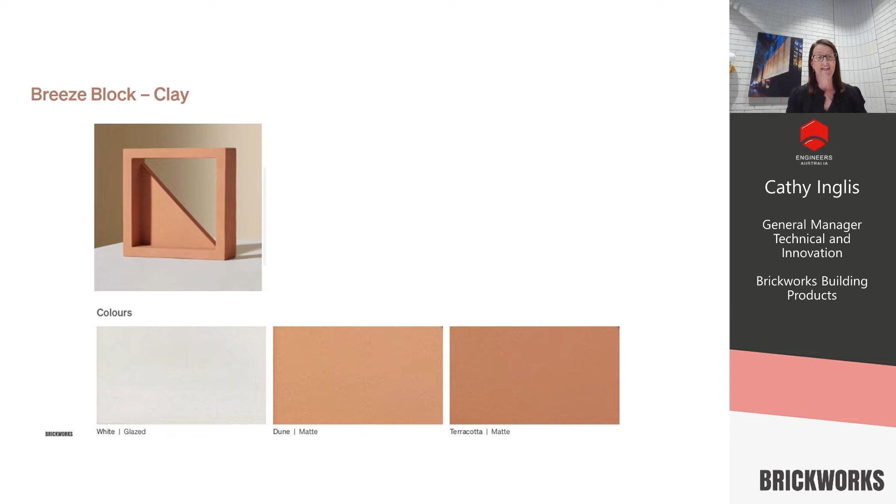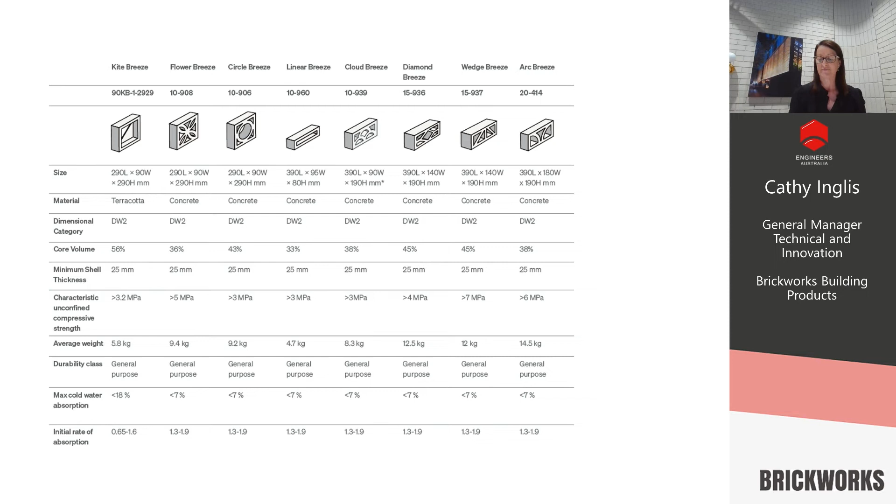So designing with the breeze blocks, what can be built? Obviously, there's a lot of imagination brought into this world by architects and what they want to do. They want the lightness and screening of a breeze block. They don't want to see large areas of restraint and reinforcement around the products. They actually want to have the lightness and screening properties of the blocks without the heaviness of solid walls around them.

So often we see drawings coming in from architects that are just these floating screens of breeze blocks with nothing supporting them. And that's where the engineers are going to come in, and that's where all of you come in, to actually work with the architects to help them design these breeze block walls so that they can actually be structurally sound and carry the loads that they're intended to.

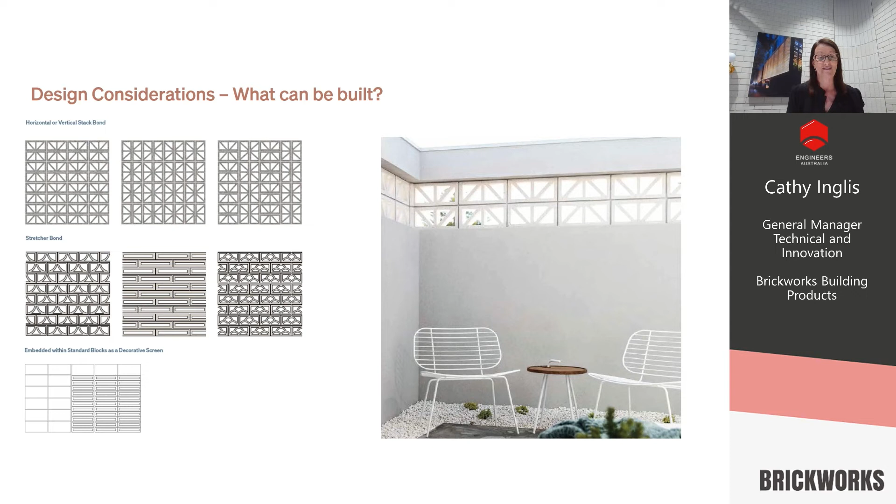So to try and make it a bit simple, in the manual, we've actually got a flow chart of design. So all the steps that Thomas and Alison went through, there's a little flow chart that steps through it. So what bond pattern are you using? What height's your wall? Are you having horizontal reinforcement? What is the wind load? And you go down the flow chart to work out which design charts you need to use for your situation.

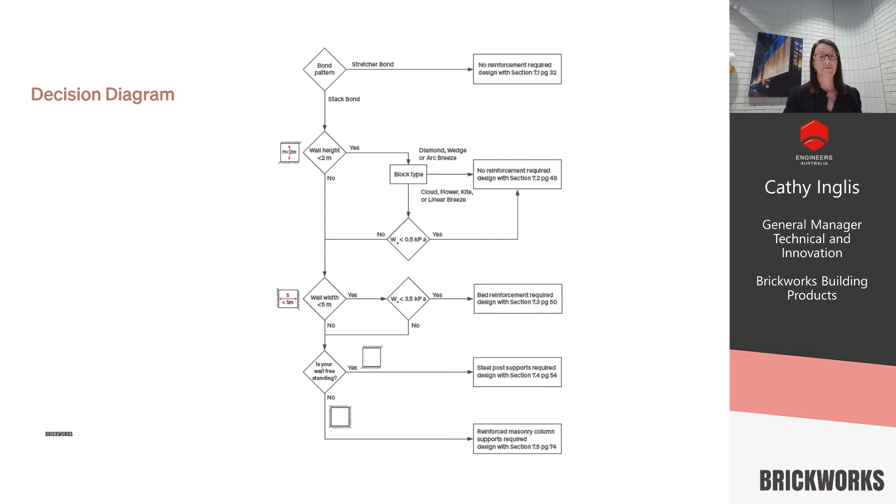As I said, there's many options given. There's walls with stretcher bond that can actually span a lot further than the stack bonded charts. We've got reinforced stack bonded walls with either steel posts or with reinforced block columns either side. So this flow chart will give you an idea of which pages to go to in the manual to look up the design charts.

So now looking at a recent project that's just under construction. This is Aria at Kangaroo Point in Brisbane, designed by Bates Smart Architects. This project has breeze block screens on the balcony levels of this 7-story building. These actually have quite high wind loads. It's quite an exposed building, so there is quite a significant wind load on these panels of blocks. They do range in size, in width.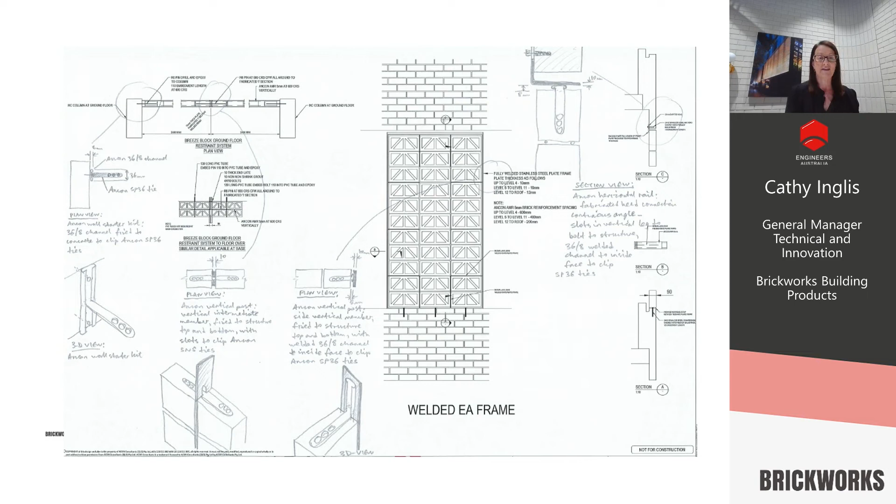Now, they also wanted these breeze blocks to be 70 mil thick. We actually don't have a 70 mil thick breeze block, so they wanted to get the 140 wedge breezes, cut them in half so they get double the output of the blocks as well, and use that. Once we've gone down to a 70 mil footprint for the wall, it's really quite narrow, so they needed some significant structural steel to support it for those wind loads. And also they wanted them stack bonded.

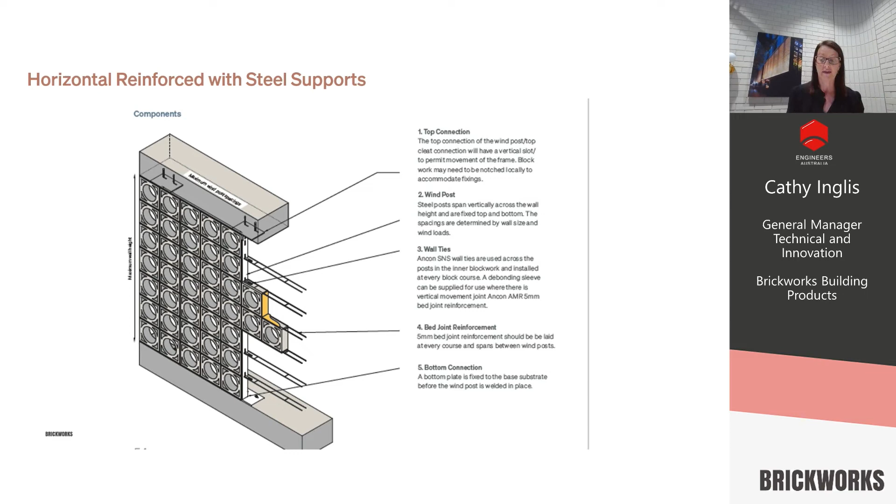So looking at a steel post between the blocks, this required the AMR horizontal bed reinforcement in every bed course, interlinked with the wind post depending on the wind load and the span of the breeze blocks. This is with top connections into above and into the base, as has already been covered. But it was a simple way to do it. Originally the concept was custom-made steel posts, and then Ancon came to the party and worked with the architect to come up with the Ancon wind post for this project.

When using the Ancon wind posts, it depends on the thickness of the steel and the depth of it. As these blocks are only 70 mil, the steel isn't very deep through the depth of the wall, so they needed thicker steel to carry the loads for those breeze block sections. Some of them were quite narrow, only 3 blocks wide, then 4 blocks wide, and a couple that were 5 blocks wide. But it was able to be done with the wind post and those masonry tie connectors that run through the product.

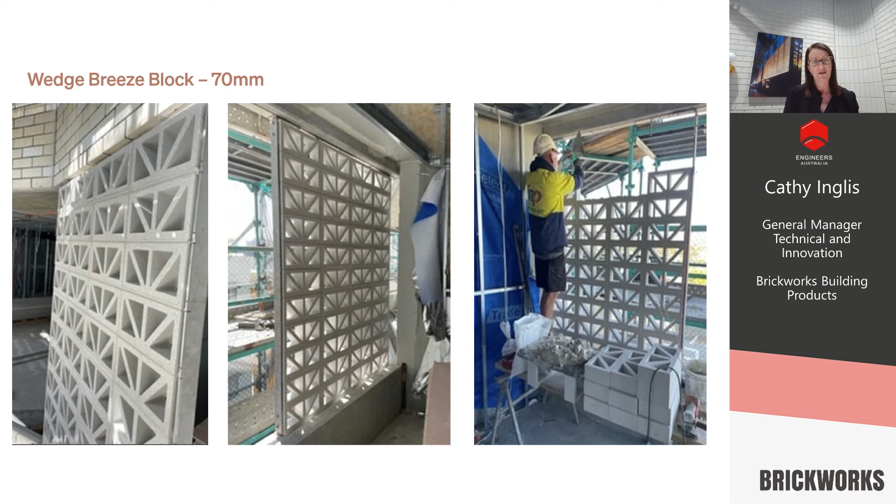This is now under construction, and here's some of the images from the project. You can see the blocks being laid, some of the steel around it, but it's essentially a steel frame around each section of the blockwork on the balconies. Some of these also had to deal with barrier loads and had a little bit of extra reinforcement included in them.

But using a range of the masonry connectors, it gives you the ability to design around it. On the ground floor, they actually used the restraint to the concrete columns. So to the precast columns, you can have run the restraint up, and then the wall ties will sit into that. For the intermediate vertical posts, you can see that centre image there has the wall tie that's placed through the opening in the wind post and then turned so it sits flat and bears on the block surface.

There was also another option where they looked at a head connection detail to the concrete plate running off an L angle bracket at the top with connectors down into the blocks, into the perpend joints. So there's lots of options that can be looked at depending on the design of the units and the overall appearance you're trying to achieve.

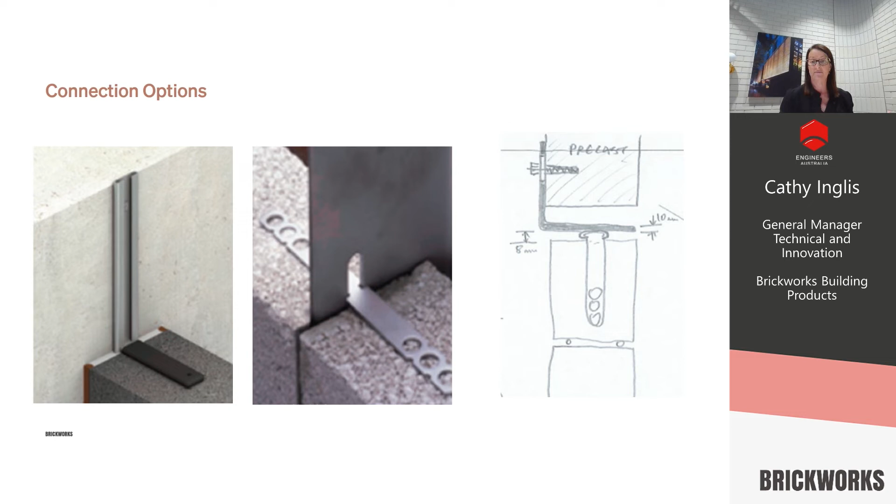One of the other methods covered was using reinforced blockwork around the perimeters of your breeze block section. And depending on the block width and how big the reinforced blockwork is each side, that determines how far the wall can span. So again, these are horizontally spanning with reinforcement in the bed joints and the concrete blocks each side. So these are concrete blocks that would be the similar width to your breeze block.

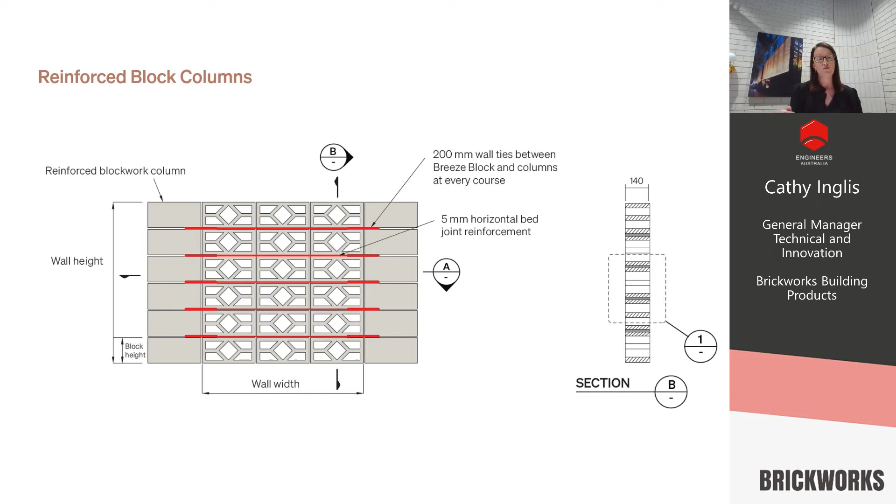You put the 5mm horizontal bed reinforcement in every horizontal joint, and the reinforced block columns have 2 N12 bars in the columns, and they're core filled, and that will provide the support. So in the manual, it covers charts with 1 block wide, 2 block wide, 3 block, and up to 4 blocks wide. So you can increase the span of your breeze block sections of wall. And it actually looks quite good with the sections of solid masonry and the breeze blocks. It will depend which one it is, what you do, but there's charts for all of those covered in the manual.

This is a current project we're working on again in Brisbane, up in Toowong, and this is designed with the wedge breeze, which is one of the wider base blocks, so it's got a bit of capacity. But they're now working through all the options of how to restrain this to the building and how to get structural capacity. So they're looking at a range of steel posts and what they can and can't use to be able to support this. Again, the first concept of this was just this thin veil that wrapped around the building with no solid connections at all. Now they're tweaking it to make sure the design can actually work.

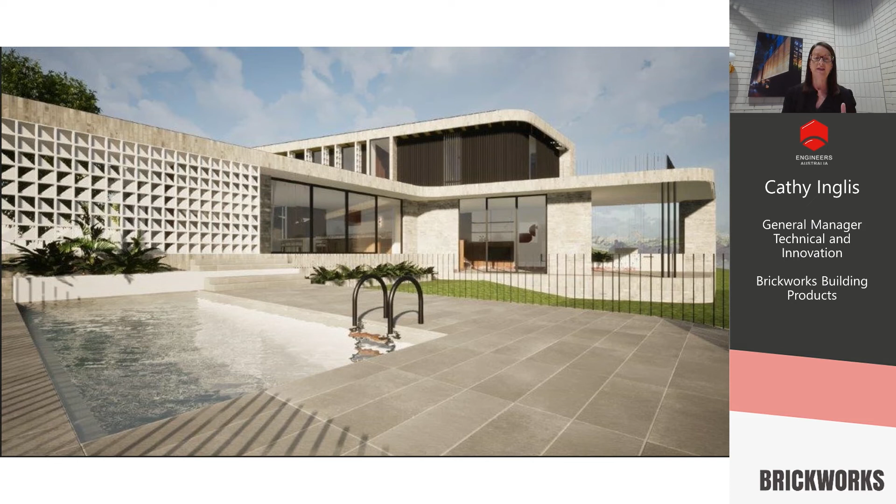We also get projects where this is an exposed coastal headland and the architect's drawn in the kite breeze blocks, which are only general purpose grade, so they can't actually be used in a severe marine coastal environment because they don't have the durability at this point to be able to be used in that application.

When you're looking at designing breeze block walls, there's other things you've got to consider: impact loads, barrier loads, but also in your design, looking at other restraints that may be necessary with, say, climbing. If a wall's right behind a pool, I can imagine lots of children just climbing up that breeze block wall and then trying to jump into the pool. So consider elements of the design for safety, because the breeze blocks do provide a platform for climbing as well. So it just needs to be taken into the scope of the project to make sure that it's covered in safety and design.

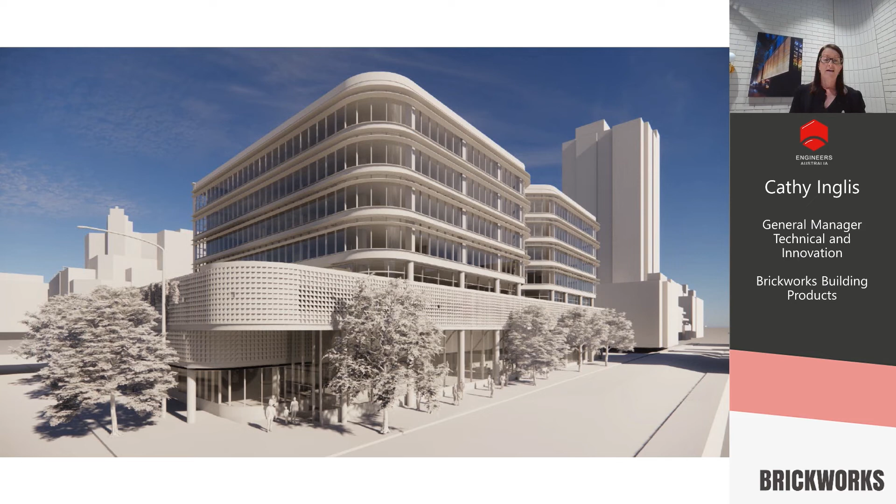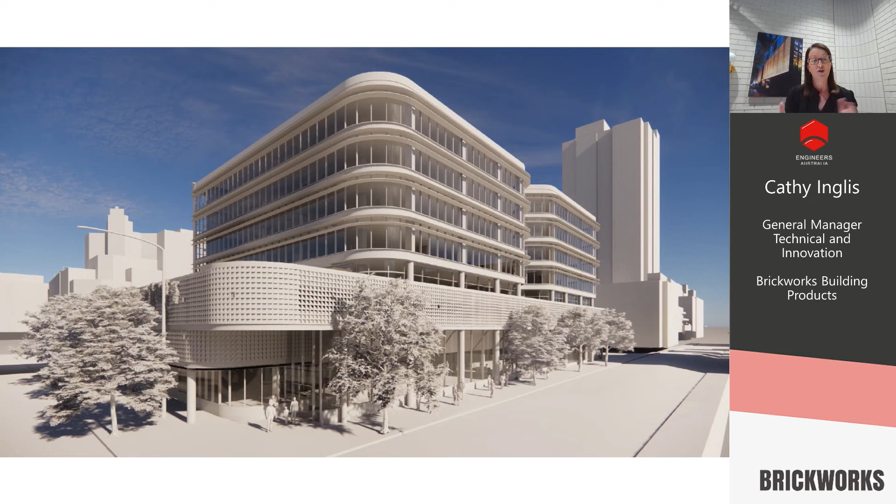Getting applications for curved walls. Now, obviously, the blocks are rectangular units. They're 390 long, or some are 290, some are 390. Quite hard to curve longer units around a nice curved shape. So there's a potential on curves to actually install the breeze blocks vertically so that you can actually get a tighter radius around the curve.

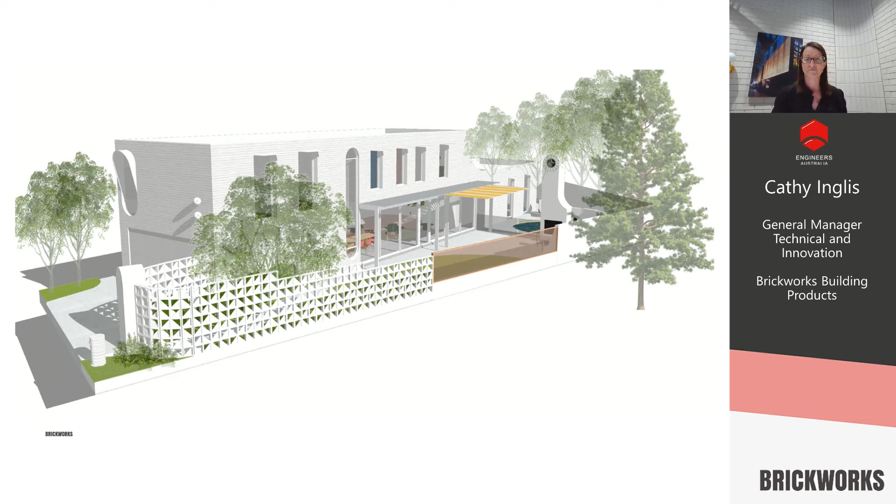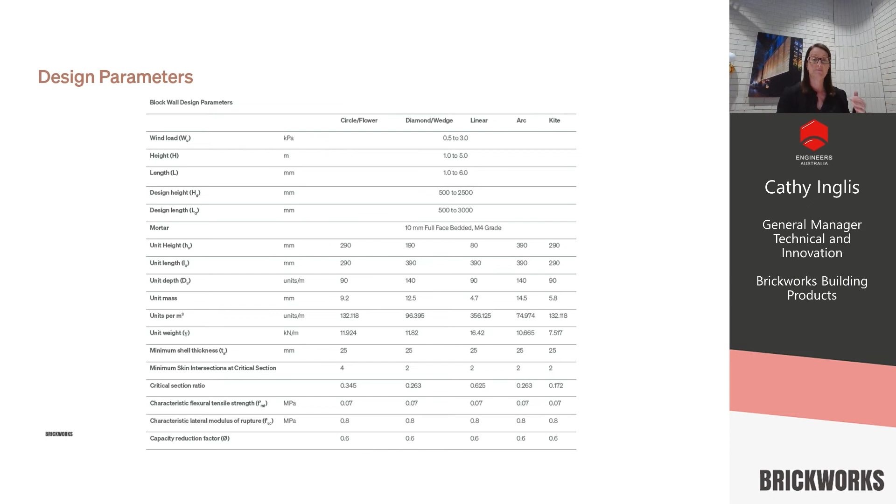You could need to go back to the drawing board, have a look at some other ways to restrain that wall. But if you're looking at walls that are outside, at the end of the manual, we actually cover off all the design parameters of the blocks. So for each block, it gives the dimensions, the mass, the section properties, all the things you need to be able to actually design your own restraints and your own wall depending on the specific circumstances of your project.